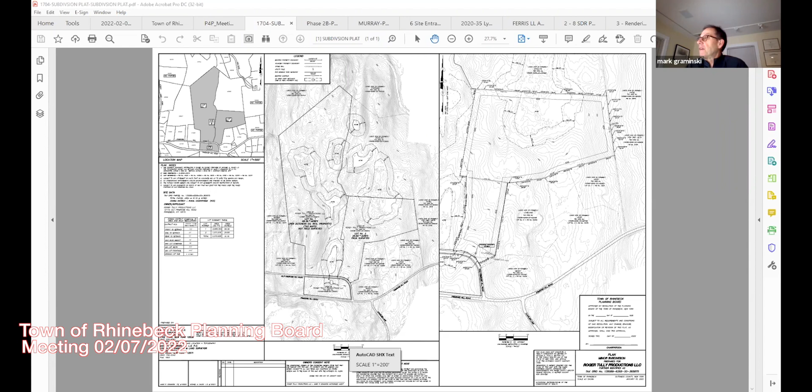The purpose of this application is a proposed minor subdivision to create a parcel on the east side of the parent parcel, identified on the plan as lot number 2. That parcel size is 24.6 acres, and it has been field surveyed.

I am the engineer on the project. Mike Dalbo, surveyor in Hyde Park, has done the boundary survey work on the property.

The balance of the property, located to the west of lot number 2, is identified as lot number 1. That property is not only on the west side of lot number 2 but also to the south. If you notice, there's a land hook on Old Primrose Hill Road, a small piece on the south side that's included in this parcel.

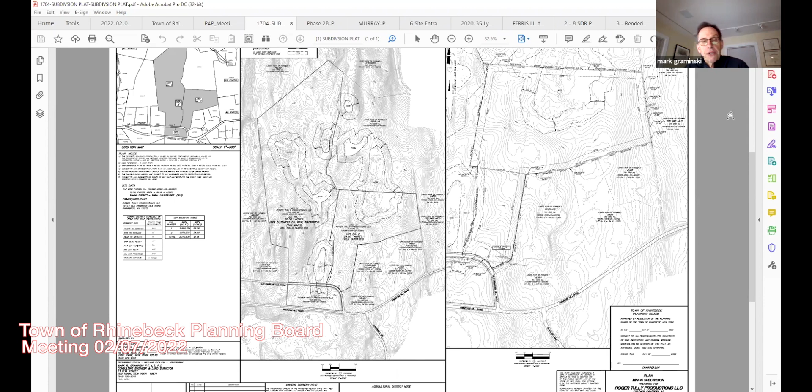So this application is fairly straightforward. It's to create lot number 2, a 24.6 acre piece for residential development. If you go to the right side of my drawing, panel number 2, I show more detail relative to that parcel, including site topography.

Obviously, access would be off of Old Primrose Hill Road. During the initial site visit with the surveyor, access is shown right at the apex of that curve, anticipated to enter into the larger portion of the parcel. You head in over that first stone wall you see, through the narrow section of this lot, for development into the larger portion of proposed lot number 2.

Along with topography, I've identified through Dutchess County GIS some ACOE wetlands, Army Corps wetlands, located on the property. Specifically where Jim's highlighting right now, there's a wetland area there, and appropriately I've shown the 100-foot adjacent area associated with the Town of Rhinebeck wetland ordinance.

And if you scan to the left on that larger portion showing the entire parcel, I've also identified wetlands that have been identified through the Dutchess County GIS. So just in summary, this is the creation of a little more than a 24-acre piece for residential development.

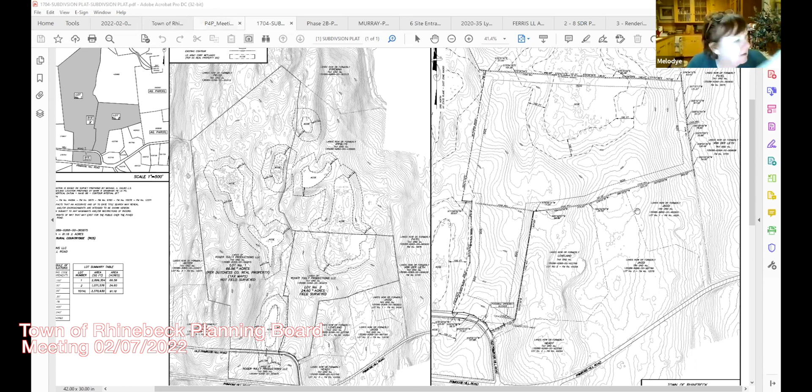I can do that. Give me 1 second.

Okay, draft procedural resolution for Roger Tully, minor conventional subdivision requiring site plan special use permit. We'll accept the application and supporting documents as adequate for further review by the planning board, classify the action as Type 2, and schedule a public hearing for the application.

On, would be March, what's the date, March 7th? March 7th at 6:45 - no, it'll be 6:15. 6:15, yeah, correct, okay. Yep, new hours, one's still 22. Messed up. Got it, okay.

Delegates planning board members who would like to make a site visit. I'll go - don't all rush to the front of the class. I'll go, please - that's Delise.

I can do it, Melodye, if we can do it this week or early next week. Delise, is that workable? Is that workable for Mark and Delise?

Mondays are actually ideal for me, if it's possible. Yeah, I'm available next Monday. Okay, so it will be Delise and Edna, and I'll leave it to the three of you to work out the details of the time.

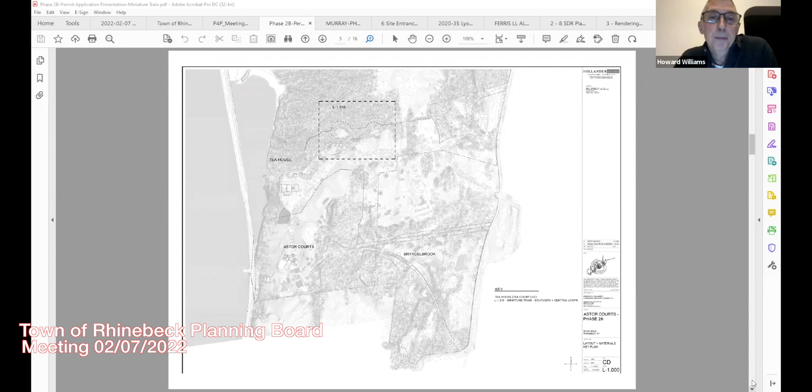So this is our current layout. We're currently applying for just 2 phases. You'll remember in the master plan, we have 5 phases: a northern loop, a western loop, and a spur off to the tea house property that are not included in this. So this is about 2/5 of the total proposal for the train.

We're doing this in part for a couple of reasons. I think you can imagine there aren't many contractors out in the world who have built a miniature train before. So working through the logistics of an economical way to build such a train takes time and effort, and we're doing just these 2 phases in order to work out all the kinks in that process.

I think our client also wants to use this for a period of time to get a sense of how much they may enjoy using it and how much his guests may enjoy using it. So this may come back as further applications for the northern, western, and tea house spurs, but it may also just end with this application, where we have to go through this process to understand it and all of its complexities.

But I also think it's really important for the board to see these first 2 phases. Instead of approving the entire train in one swoop, you'll be able to see a smaller portion of it and begin to understand the scale of it and its impact on the ground, and see what we believe is actually a relatively minimal impact on this property. So I think this is a good thing for the board to see as well.

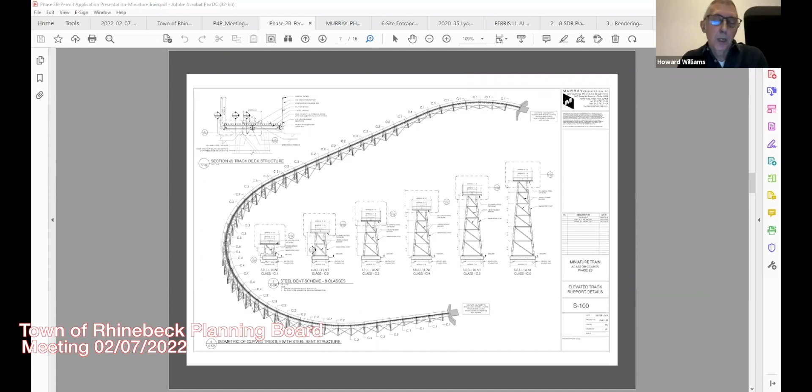Okay, this is from our engineer. This is one of the construction drawings for those trestles, and you can see they're made out of steel members. We're choosing Corten steel to make this. These are in the form of what are called steel bents. They're not really like 4-square towers; these are single uprights where there are two long steel upright members with a lattice between them that keeps them supported. This is one of the most efficient ways to build such a thing, and I think this is important for the board: it causes the smallest impact on the ground because you have only 2 points where it hits the ground along each bent.

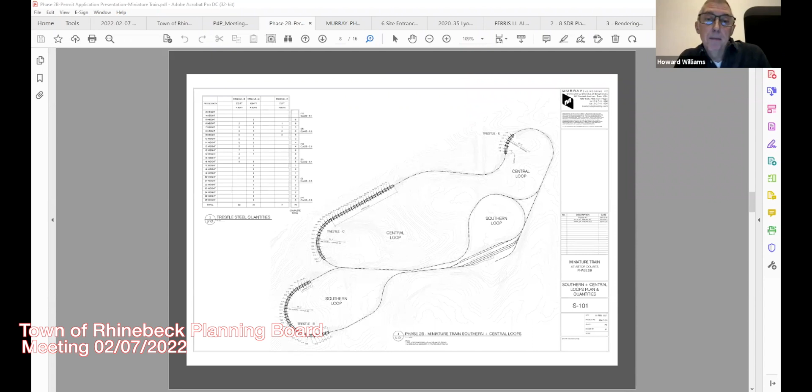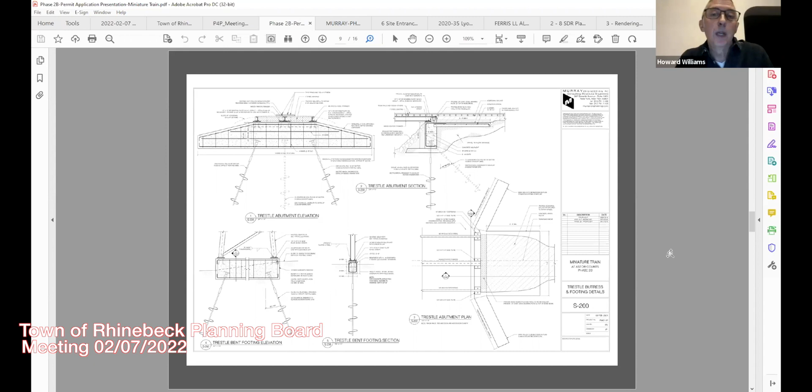The important thing about these technical details is you can see the helical piles in the upper left. Those are directly driven into the ground by a small auger machine. They require no excavation and don't disturb the ground in any significant way. On top of that is placed a concrete tie beam that's basically just set on grade, slightly buried but not requiring significant excavation either.

The reason to choose these is, in one sense, they're economical, but also this is the method used in a lot of sensitive environmental work. In wetlands, for instance, if you were to put a boardwalk through a wetland area, you would use helical piles so you're not digging into deep foundation and disturbing or building up a lot of silt.

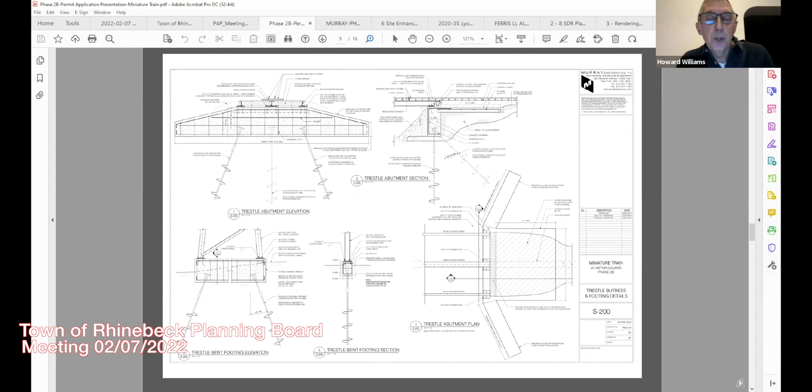So this shows a bit of the sensitivity that we're trying to take with the construction of this train. Next slide.

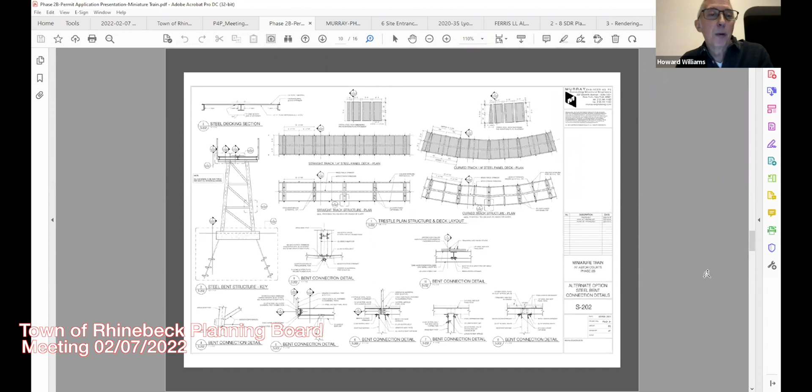Just a few more details here, so you know we're looking at this very, very carefully. One question came up during an earlier discussion at the planning board hearings about handrails on the trestle itself. On the left-hand detail, you can see there are handrails along all of these. We're taking safety into consideration here as well. Next slide.

Now these are some typical construction photographs. You can see the track itself is made by very small machines, which has a very narrow impact on the ground. Through each of these photographs, you can see the woods are immediately adjacent to this work and are not touched. We intend to follow this kind of construction method through this entire project.

I think you can also see that the impact on the ground of building a train like this is really not much different than building, say, a pathway. If it were just a walking path, we'd go through similar efforts to stabilize it. So the train itself is not deeply impacting this site. Next slide.

This is just to show how the train can come into close proximity of trees, and we do not need to take those trees out. We have no impact on them really whatsoever. Next slide.

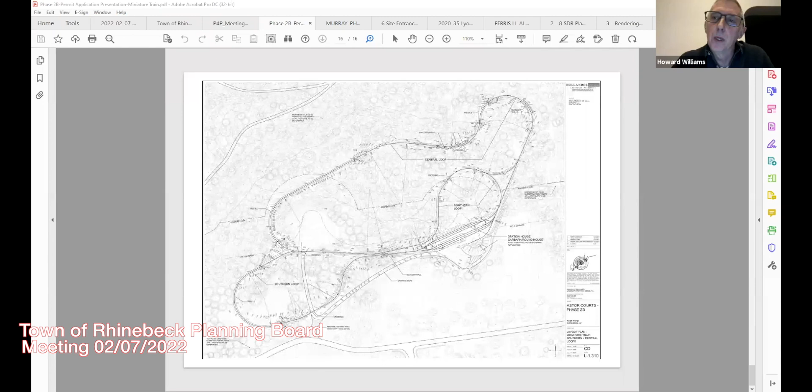Okay, I would open it up. Actually, if I can just follow up on one of your points, Jim. Who determines if these are actually structures? What agency within the town makes that determination?

If you had a question about that, you need to go to the zoning administrator. We did spend some time, Howard, looking at it in terms of the definitions and feel somewhat confident in that, but you certainly have every right to go to the zoning administrator and ask for an interpretation.

Okay. I will open it up now to other planning board members to offer comments or questions. Melodye, I have a couple of questions, I guess, possibly comments. Okay, in terms of Michael.

The construction, particularly along the trestle areas, especially when we're going up 24 feet, things like that - will there be some form of scaffolding, some sort of way of laying the tracks as you build these so you can get them up there? I think you're going to need, alongside the actual train track, some way to get equipment in there to do that. It's also, I guess, part of that same concern - getting emergency vehicles in there.

One reason you're going so high is because the terrain is a little bit difficult. And I don't think if the thing stops and it's up on 24 feet, you can really expect emergency personnel to go in there with ladders to get people out. If someone has a medical emergency, you've got to be able to get them quickly to an ambulance, something of that sort. So I think more thought has to be given to emergency access - if something should go wrong, it could go wrong.

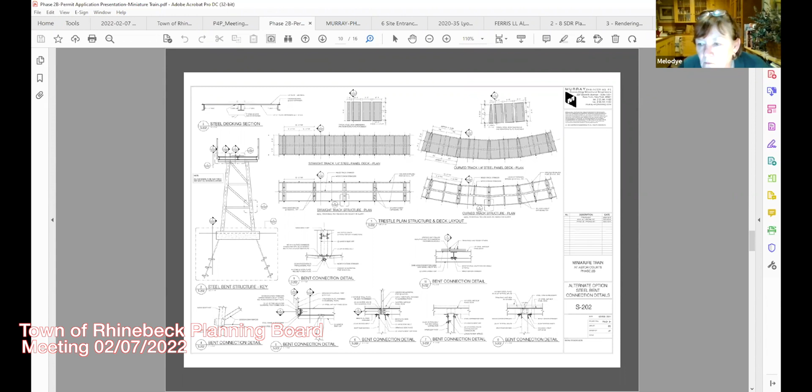What is the general expectation regarding maintenance? How frequently do maintenance vehicles need to be there? What does it take to maintain a train like this? Most of the maintenance of these things is actually done by a car on the rails itself that has all the necessary equipment on it. This is relatively small welding and just bolting kind of work, so there's no need to bring a large machine in. Most of the maintenance generally is just cleanup, because debris falls in the area, and that can be done from the track itself as well.

Okay, thank you. Perhaps you said this, but maybe I missed it. What's the speed that it goes? In general, the speed is about as fast as a fast walking pace, really not much more than that. I don't know what the miles per hour of that is, but it's been described to me as simply a brisk walking pace.

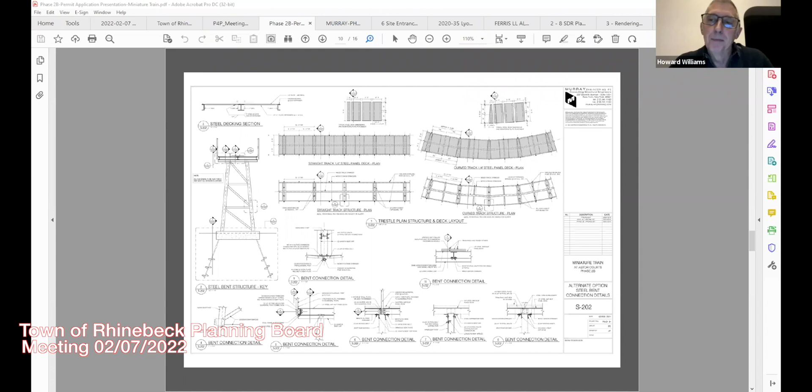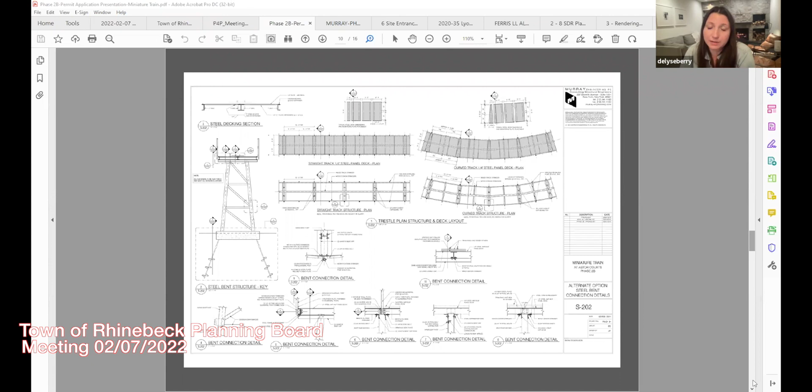Okay, awesome. I totally agree with everything everyone said regarding the concerns, especially emergency access and the height of these trestles. But I think the only other question I would have is, I know there's potential for expansion, and it's unclear whether or not that will happen. But any foresight we can see towards the long-term plan of just how far this will go is always appreciated. Well, that's in the master plan, that is the full extent of what we would ever propose. Okay, great. But there are a lot of variables in that decision.

All right, anyone else? Well, given that so many of you on the planning board know, I don't know if Howard knows it, I know Mark does, we have had a change in representatives from CPL, which is our engineering consulting firm. We will obviously be referring this to them, and it's going to be my recommendation that we, as soon as possible, schedule an engineering workshop between you folks and our new engineers so that they can be oriented quickly to the overall project and more specifically to the engineering aspects of this particular application. So I think we'll do that, an engineer to engineer workshop.

Jim will reach out to you and reach out to CPL, and we'll see if we can get it going, because we do have questions to be resolved about the height. And if the height is fixed at 20 feet or under, then we're going to have to talk about how we resolve that. So if you're amenable to that, I think we'd like to get that on the schedule. We're not looking to slow down your project, we're just looking to get all of these engineering questions that I think are substantive and important addressed as soon as possible. Is that amenable to you? Yes. Understandable. I said amenable. I'm glad it's understandable, I just hope it's amenable as well. We will work with you.

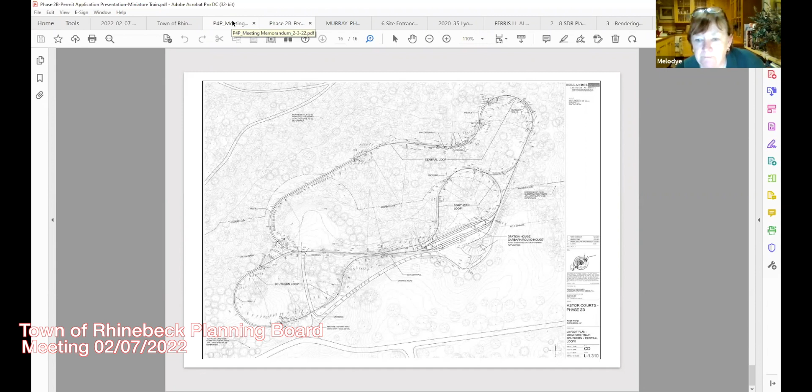Okay, I would encourage my colleagues on the planning board, if you, in reviewing this, as you go forward and review Jim's memos, don't hesitate to forward questions to us, get them directly to Jim and myself, and we'll make sure that they get factored into the discussions at the engineering workshop.

Okay, I think we're at the point of a draft procedural resolution. Jim, do you want to summarize it? Sure. Draft procedural resolution accepting the application and supporting documents for further review. We will classify this as a type 2 under SEQR, for which coordinated environmental review is precluded. Just as a note, it was done as a type 1 for the master plan, but each of these individual elements will be going under type 2 based on how the original SEQR was done for the master plan. So we will classify it as a type 2 and schedule it for March 7th, 2022 at 6:15 p.m.

All right, planning board, at this point, are we wanting to send out 2 people, or do we want to get something together for the full board if they're interested? Do people have opinions about that? Well, I know HAPAC will definitely want to go. CAB should definitely be going. Do we want to start with 2 planning board members and see where it goes from there?

You're not helping me here, people. Okay, this is Craig, and I'm interested in being one of the two or one of the whole group, whatever the case may be. Okay, Craig, thank you. Who would like to go with Craig initially? I'll go with Craig. Okay, Michael, thank you. So let's start with that.

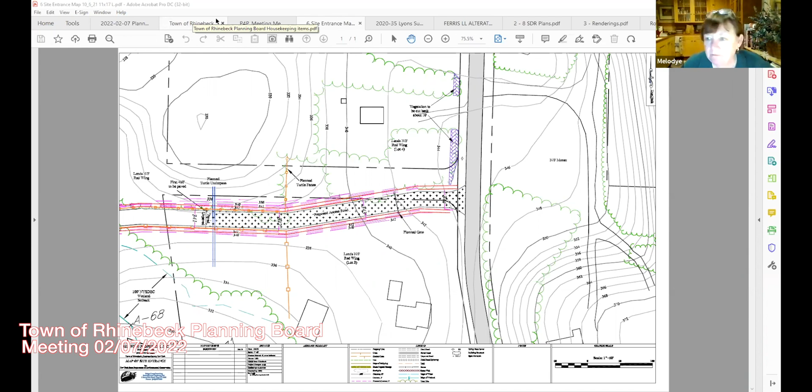So I think we're ready to look at the draft procedural resolution. Jim? So draft procedural resolution for site plan and special use permit, accepting the application, supporting documents is adequate for further review by the planning board.

We will classify this proposed action at the next meeting at the public hearing upon my working with John Lyons to determine the proper path forward. I think it's class 1, type 1, but we'll work on that. So we will classify it at the next meeting and schedule a public hearing on the application for March 7th, 2022 at 6:15.

And I think I had recommended we do a site visit with all planning board members. Does that sound like a good idea? Does everyone agree? I think it's a good idea. And so perhaps we'll say that here and then ask you to work with the applicant to identify some potential dates where the site visit can take place. I can definitely do that. Okay, thank you.

And we will want to refer to this. Oh, sorry, go ahead, Gretchen. I just wanted to mention that the deadline for additional materials is February 22nd for March 7th, in case the applicant doesn't feel that's enough time before we definitely schedule the public hearing. Yeah, the only thing that's not in my control would be the traffic study. Everything else that has been requested is certainly no problem to get in by then. And I really don't think it will be an issue to get the traffic study to you by then.

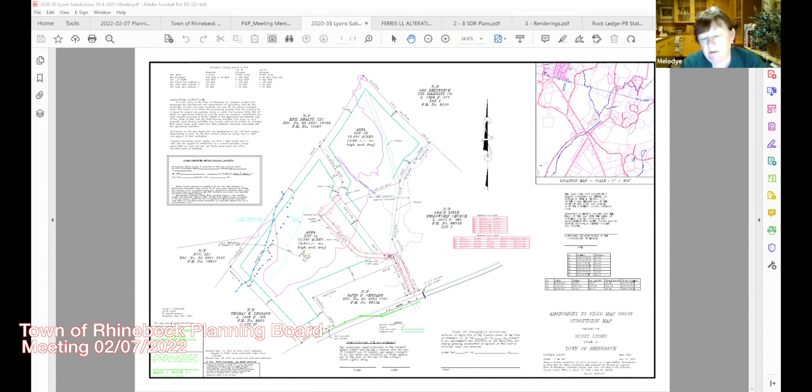So, unless anyone has a strong objection, I would recommend that we continue the public hearing to next month until we have all this information nailed down.

If you look at the draft resolution that was sent out today, it just said that it required the letter from the engineer stating that the design was approvable. It didn't say that it required Board of Health approval.

Okay, well, I just made my comment, so I'm waiting for my colleagues to weigh in. Yeah, Marie, that draft was drafted under the assumption of what we've been discussing previously, that we'd get approval from the county. The problem is the county says they won't approve it unless a map is filed - it was kind of a catch-22. So what I sent out is a draft resolution, and it was under that assumption.

Certainly, if something were to change, the planning board members have every right to change that resolution now before it gets finalized, but that's why it was written the way it was - under that assumption previously.

Well, Melodye, as far as the net density discussion goes, I can't find it off the top of my head right now searching through this. So if we want to address that question, I'm going to have to go back through the code and look at it in more detail just to identify the exact section. I just can't do it off the top of my head right now online.

Okay, well, I don't think you should have to. I think Edna's question is, it's important we resolve that. So I'm opening it up to other board members to entertain how we want to proceed. You have my thoughts.

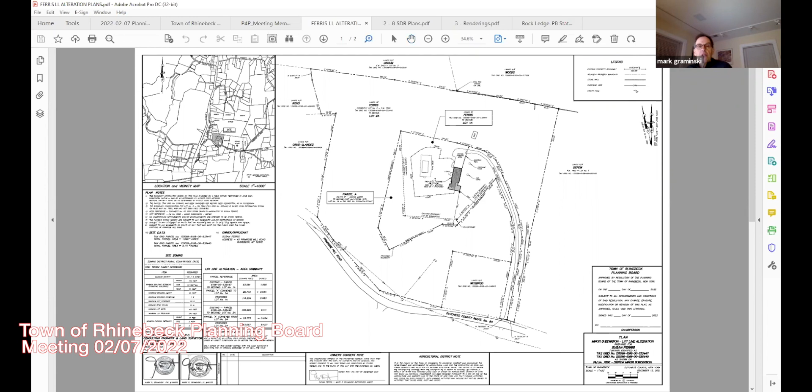The reason for this lot line alteration is Susan is proposing a building addition, shown on the plan. If you zoom in where the house is, you can see I define it with different shading—there's cross hatch shading where the existing residence is.

Then there's an addition being proposed to the south, and that's just rooms—no additional bedrooms, just living space. The reason for this application is that the building addition...

...extends over the existing septic field, which I exposed, and all it is a septic tank and seepage pit. Consequently, there's a new septic proposed, and the water supply is located to the north of the existing garage, right by the driveway.

So what coincides with this application is I've done extensive work with the Dutchess County Department of Health regarding construction of a new septic system, and the health department also requires a 100% reserve expansion area associated with it.

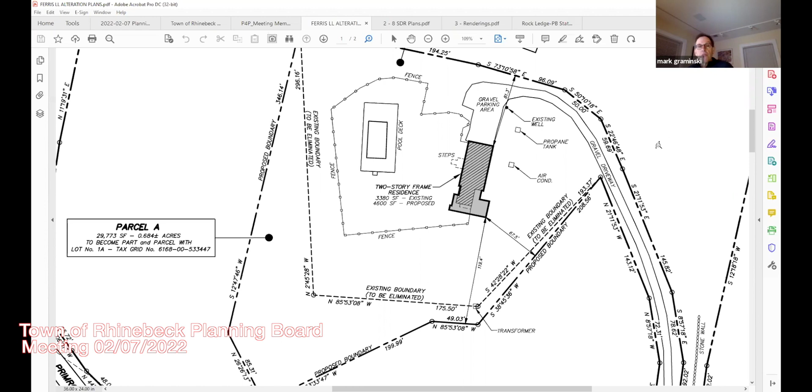So the new lot configuration takes into consideration the locations of both the primary and expansion area—you can see that from that second drawing. The current lot line for this parcel goes right through where the 100% reserve area is, and parcel A shown there is a bit of an odd configuration, but it allows for construction of the primary septic system.

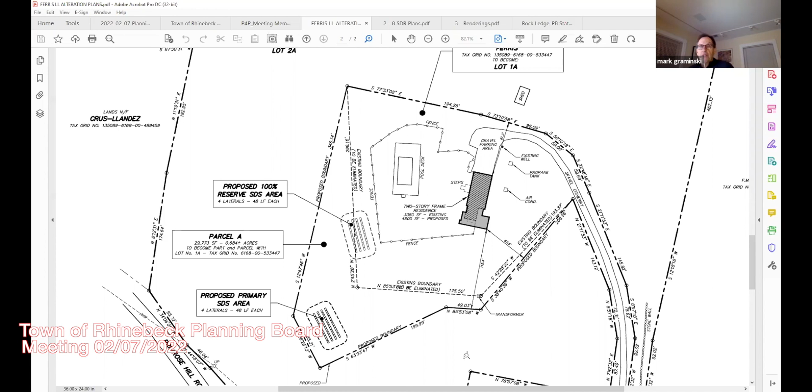Plans have been developed and submitted to Dutchess County Health Department. David Pearson is the review engineer for the health department on this, and he has determined these locations are suitable and done an initial review, but has requested that the Town of Rhinebeck approve the lot line alteration and map filed, with final health department approval to occur on the new lot configuration in that filed map.

I'll also note that the area being added to the existing lot is 0.684 acres. So the new lot, proposed lot number 1A, total parcel size originally starts at 1.99 acres—it's now 2.683 acres.

That larger parcel that wraps around the existing parcel has that 0.684 acres deducted from it, so proposed lot number 2A totals 8.427 acres. The only changes to the parcel are to allow for design and installation of a new septic system and accommodate a reserve area.

No other changes to the site occur. Driveway access remains the same, the location of the majority of the building stays, with just the addition to the south. So all that's before us is the lot line alteration—that is correct, right?

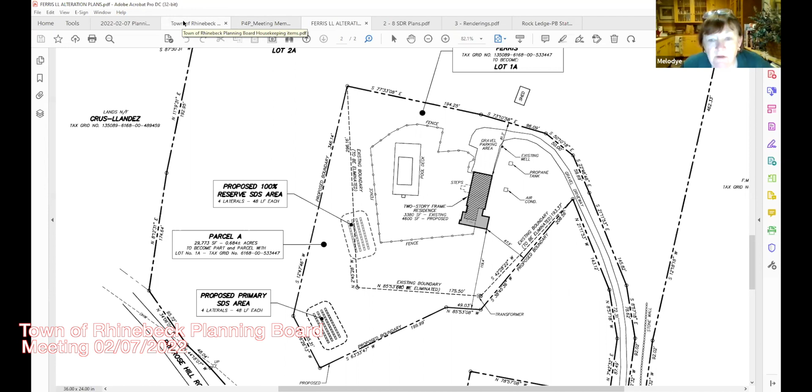So I would open it up to comments or questions from other planning board members. If there aren't any, I would ask if there is anyone from the public present. Jim, asking to have an opportunity to speak—if you'd like to speak, just unmute your line or raise your hand.

Not seeing anyone, Melodye. Okay, then I think we are at a position where we can move to close the public hearing. I move that we do that.

Thank you, Edna. Second. All those in favor? Aye. Any opposed? Any abstentions?

Okay, thank you. The public hearing is closed, and we'll move now to the approval resolution. Jim, do you want to run through it?

Sure. Draft approval resolution that I put together for tonight for the lot line alteration, reaffirming this project is a Type 2 under SEQR, for which coordinated environmental quality review is precluded. Based upon the information that we heard, it's consistent with objectives stated in Chapter 101, subdivision of land. And with respect to this subdivision, find that it is consistent with Town Code Chapter 101, Section 101.4.4, and would approve the application inclusive of the plan sheets prepared by Mark Graminski dated December 12th, 2021.

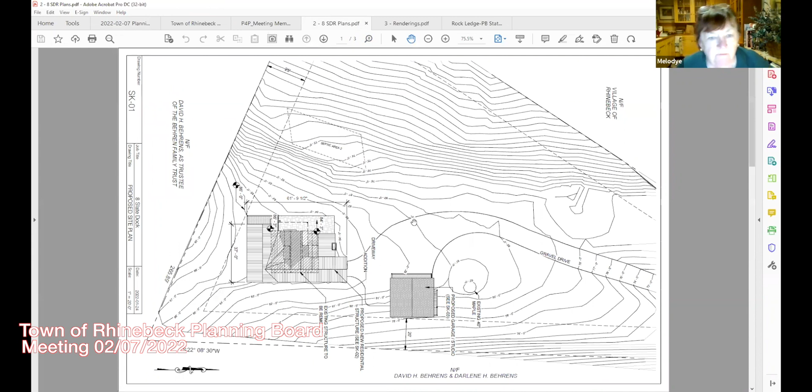So Robert, I'd like, in 5 or so minutes, if you can update us on where we are and what new information we have, we'll take it away.

Okay, so we visited you last on the December 6th meeting. We left that meeting with some constructive criticism and some direction for our special site at Slate Dock Road. The direction was, I guess we've come to the planning board knowing we have 3 variances to look for: one was the size of the house, the other is a structure in the front yard, and the third is the height of the accessory structure.

Just to give you a quick recap on what we've done. The size of the house, we reduced the program by removing program from the basement and reduced the house down to 2,512 square feet, which is only about 9% more than the zoning limit. And we're hoping that is seen as a favorable action on our part to the board.

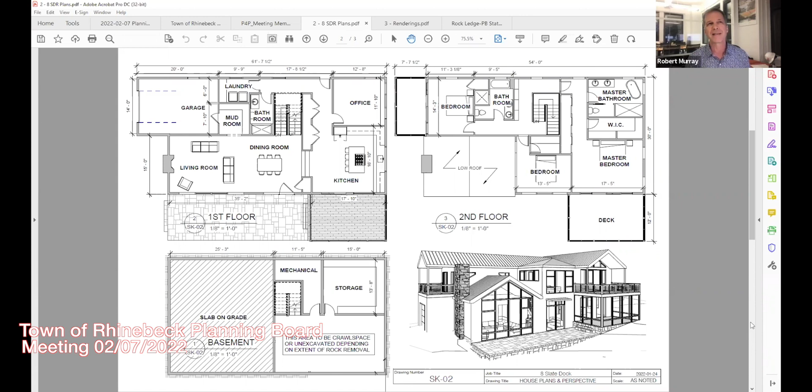Secondly, the structure in the front yard in some ways still remains kind of the easy part. This lot is too small, and it was subdivided long ago in such a way that there's really no place else to put a garage if you want one. So we think we've done our best to accommodate with your criticism and review, and the neighbors, of course, to choose a smart location that impacts as least as reasonable and possible the neighbor, most specifically at 4 Slate Dock.

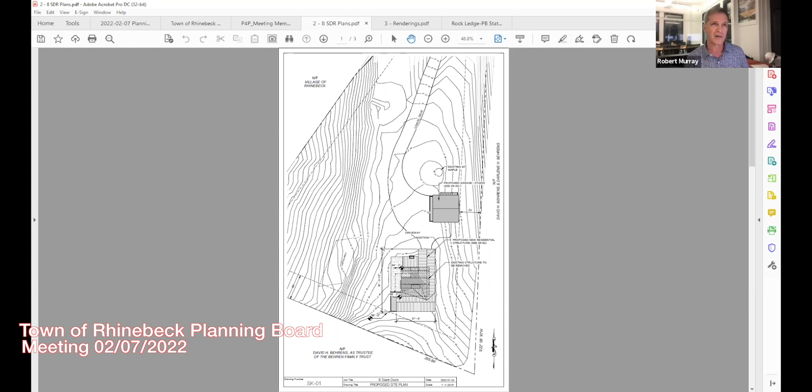And then lastly, the height of the structure. We looked very carefully at the numbers, and we did a number of things to the garage structure to reduce the impact and the height. The doors that will be put on the garage are standard height doors. They'll require a ceiling height in the garage of 8 foot 3 1/4.

We've tried to, I'll call it, squash down the roof so that it still permits a standard size door entrance in the side. That's a great picture right there. Any lower and you can't get the door in there. So before we do anything unreasonable looking, I think we've pressed it down to the lowest height.

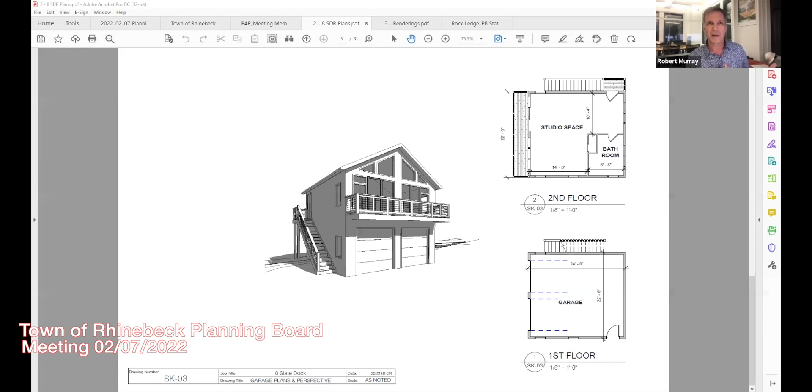So we did one other thing. First of all, I'm excited to show you the renderings we produced. When we looked at it, we decided we could move it to the south - that's the rendering there - to improve the space between the maple tree and the garage, to decrease the impact of the view, but increase the view for 4 Slate Dock. In the process of turning the garage or pushing it, the grade drops off there.

So we actually added a couple of feet of height from the grade up to the top of the garage. I would report to you that the height is 27 foot 4 inches, but that includes a 4 foot delta, or difference, between the garage slab and the grade hidden behind the bushes there.

We also did not, Melody, you recommended, and maybe another planning board member, that we consider trees and planting. And in fact, the owners want very much to add more vegetation to further mask that view.

That garage also was reduced from 25 feet that we submitted earlier to 22 feet. So we reduced it by 12% and moved it south 10 or 12 feet. We think we've positioned it as close as we can to the house, but I might like to show you the next rendering, Jim.

The board didn't ask us for this, but we thought it was quite logical that you'd say, yeah, that's great with the garage, but what about the house? So we decided to place the house.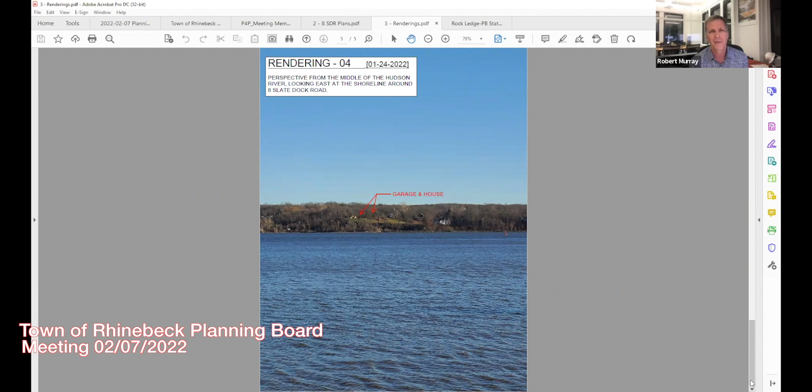And let's see, did I include one more picture there, Jim? No, that was the last one. We took a bunch of pictures, actually from the middle of the river. We even took pictures from Hutton Brickyards, but this seemed to be the best.

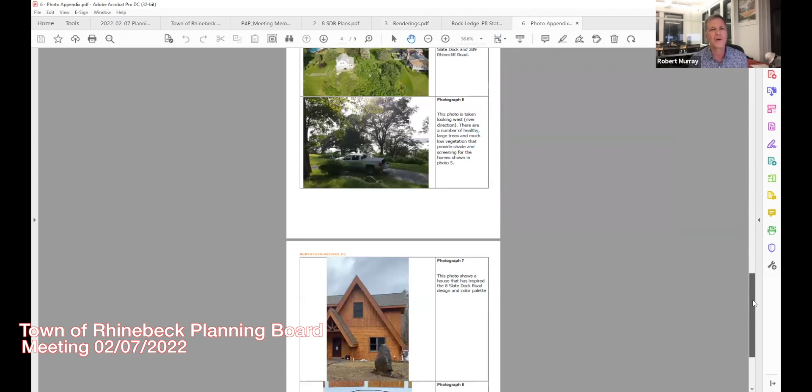So should we presume that the color rendering that you're showing here is what you've settled on? Yes. In fact, we also included a photo appendix, and on the last 2 pages of the photo appendix we show a house that was the inspiration for the color scheme, and color samples on the last photograph there.

I'd like to share that we did not receive the comments from our new representatives at the engineering firm until after 4:15 on Friday. So I realize that didn't get to you in a timely fashion, but there was nothing we could do to get it to you any sooner. So I presume, Robert, that you'll be speaking with them or following up with them.

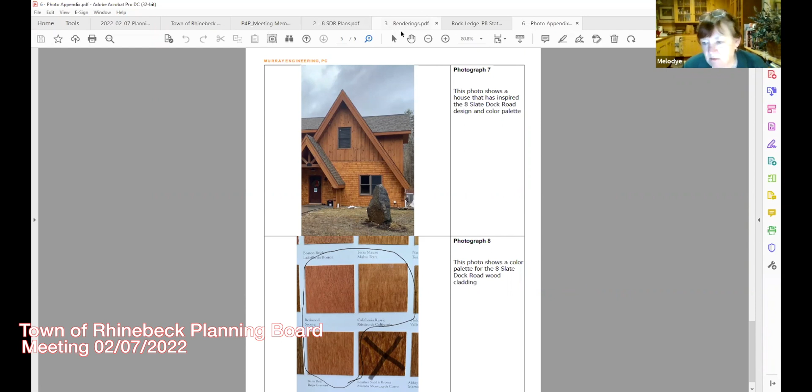Yes, thank you. I received them actually today, this afternoon. And I would say, it appears to me, I will contact them directly. I'll share information and we'll come back with a thorough response. Okay.

So I would like, because we obviously will be continuing this and have some time, we've been working with the remaining members of the CAB. We never did receive a CAB report on this project. I'd like to ask that another site visit be scheduled to include members of the CAB and perhaps Craig, who has joined the planning board from the CAB, might have some interest in visiting the site. So Craig, I don't mean to throw you under the bus, but if you'd like to take the opportunity, we'd appreciate it.

The CAB did in fact visit during. They did, but the person that visited went back to college and never submitted any report. Got it. And the other members of the CAB who have since left are not in a position to write anything, and the folks that remain have not visited the site. And because it's in the LWRP and all of those things, I think we need to touch base on that and close that door.